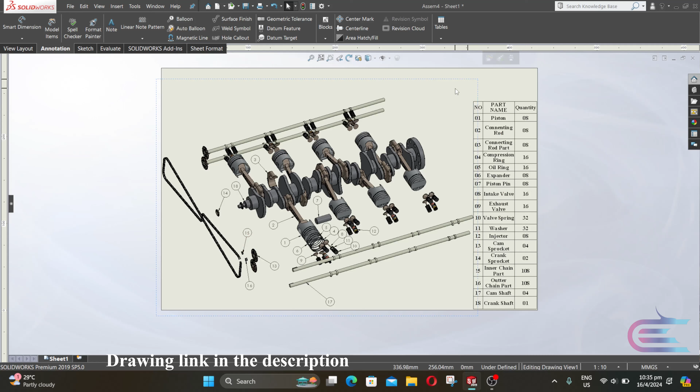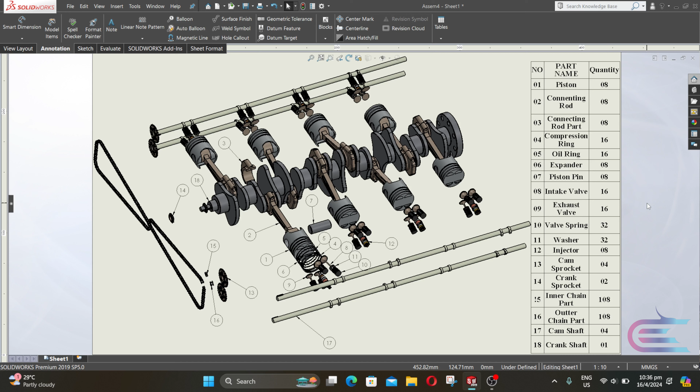In this tutorial, we are going to assemble the power transmission components of the Boxer 8 engine. First, we are going to assemble with the sprocket chain mechanism, and then we are going to use an alternative method which is a belt pulley. Remember, if your PC is not too powerful, it may slow down during chain sprocket assembly and cause serious problems during motion study. To avoid these problems, I recommend using the belt pulley method shown after the chain sprocket assembly.

Click on insert component and go to sprocket chain, then select crank sprocket and cam sprocket. Then click on open, place it here.

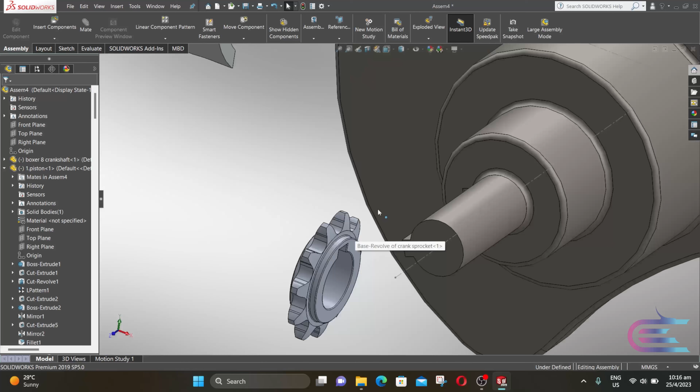Press Ctrl and select these two surfaces, then click on mate, select concentric and click OK. Now select the key slot surfaces, select coincident and click OK.

Now close the mate, expand insert component and select copy with mates. Then select the sprocket and click on next. Select this surface and then the key slot surface. Then click OK.

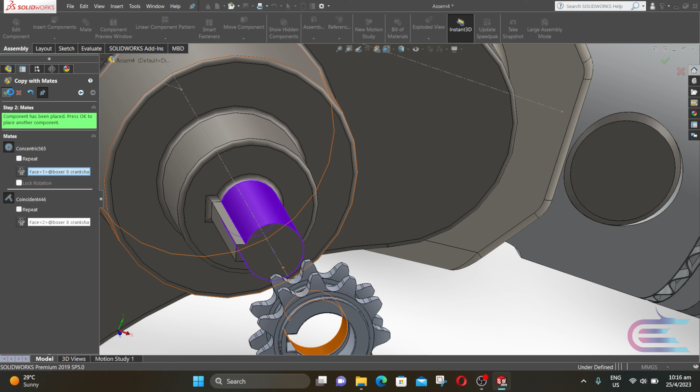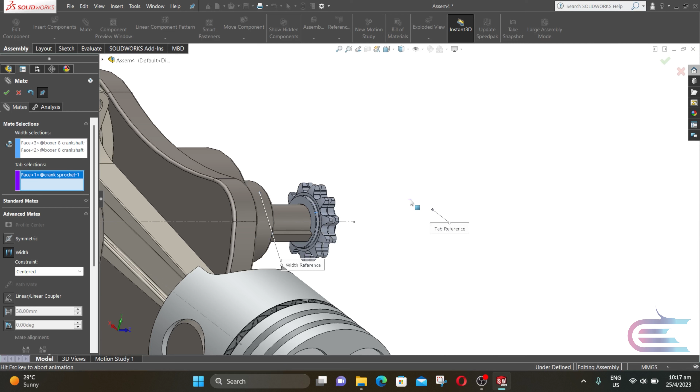Now press Ctrl and select these two surfaces. Then click on mate. Select coincident and click OK. Now select this surface, expand advanced mate and select width. Now select this surface and select both sides of the crank sprocket. Then click OK. Now close the mate.

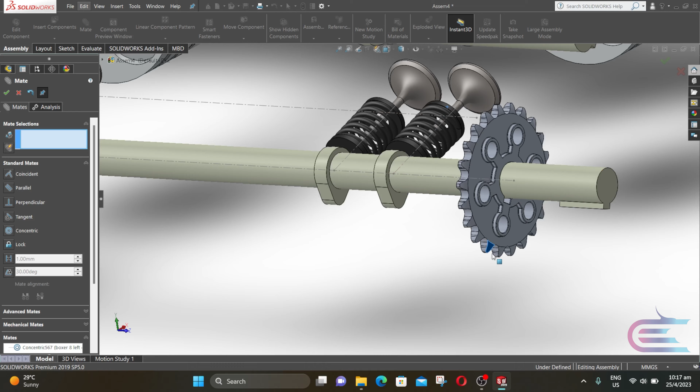Now press Ctrl and select this surface and this surface. Then click on mate. Select concentric and click OK. Now rotate the camshaft. Select the key slot surfaces. Select coincident and click OK.

Now click on insert component and select copy with mate. Then select the cam sprocket. Select this surface and then select the key slot surface. Then click OK.

Repeat the same process for these two camshafts.

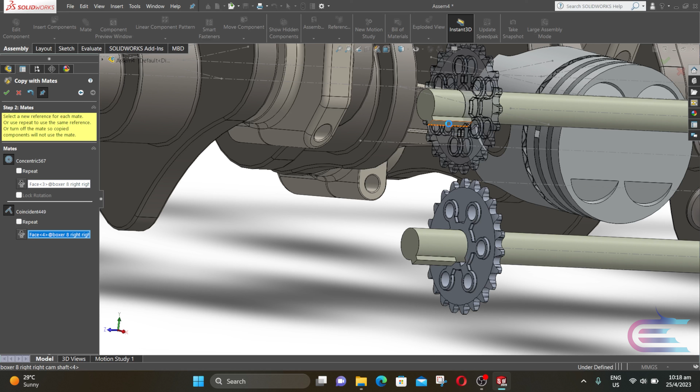Now close the mate. Press Ctrl and select these two surfaces. Then click on mate. Select coincident and click OK. Now select these two surfaces. Select coincident and click OK. Now close the mate.

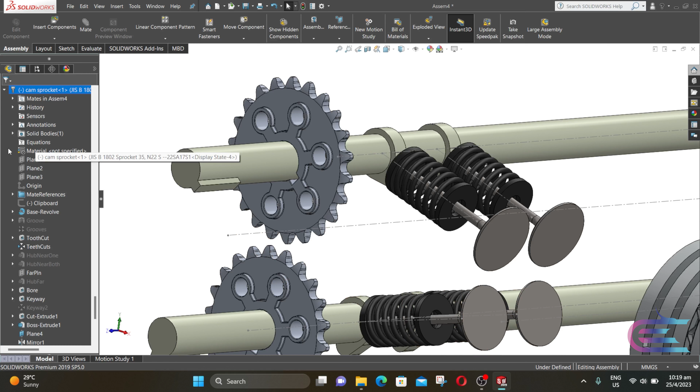Now expand any of these two cam sprockets and select the mid plane of it, which is plane 4. And select the mid plane of the first crank sprocket. Then click on mate. Select coincident and click OK. Now close the mate.

Now expand the second crank sprocket and select the mid plane of it, which is plane 6 here. And then expand any of these two cam sprockets and select the mid plane of it. Then select coincident and click OK. Now close the mate.

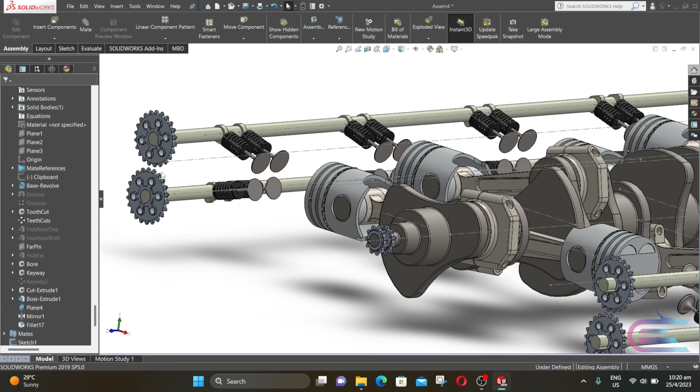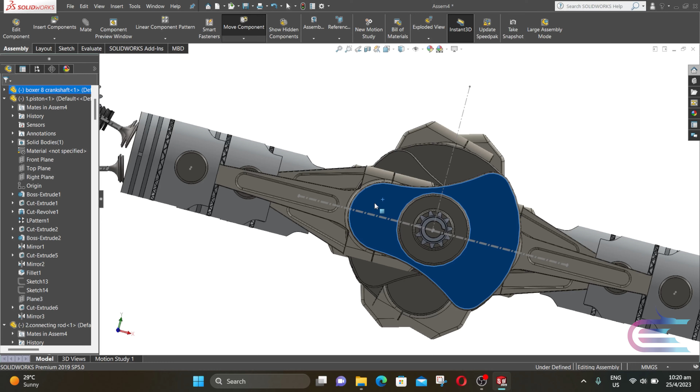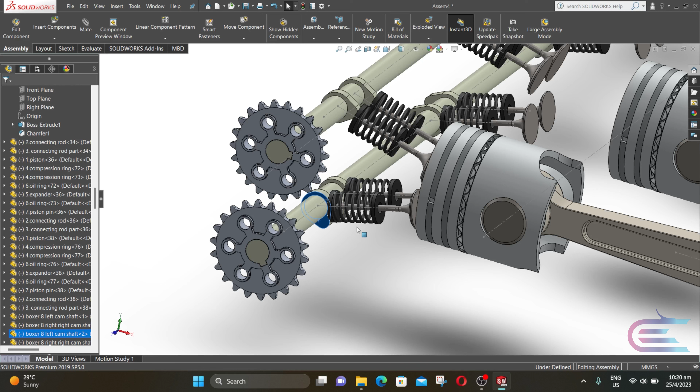Now we need to synchronize all of the engine components. Rotate the crankshaft and put the first piston at the top dead center. Now place the intake valve as it is almost open. And place the exhaust valve as it is almost closed. So the first cylinder is placed at the beginning of the intake stroke.

After 90 degrees of intake stroke in the first cylinder, the fourth cylinder will be in intake phase. So the camshaft will be 45 degrees inferior to the previous one.

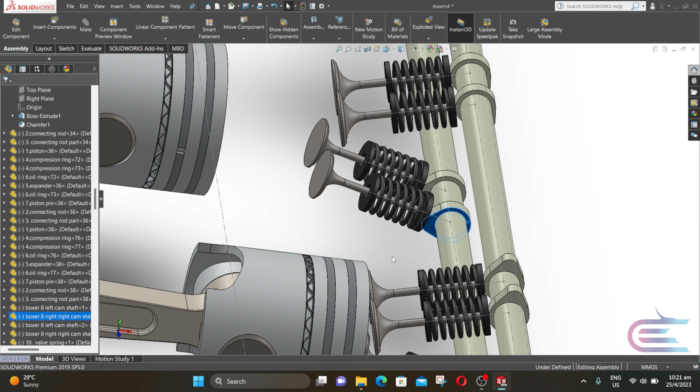Now expand assembly and select belt chain. Now select this circle of the cam sprockets and this circle of the crank sprocket. Now click on belt location plane, expand assembly and select mid plane of any of the sprockets.

Now click on use belt thickness and here input 5 mm. Then click OK. Now repeat the same process for the right side.

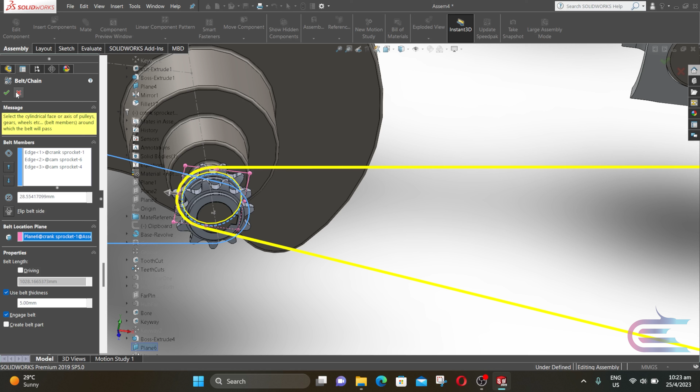Click on insert component and select chain inner part and chain outer part. Then click on open. Place them here.

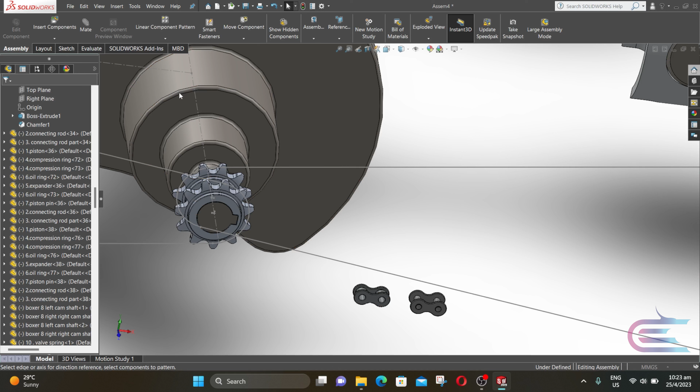Now expand linear component pattern and select chain component pattern. Select the third pitch method. Then expand assembly. Go to the bottom. Expand belt and select the belt path sketch.

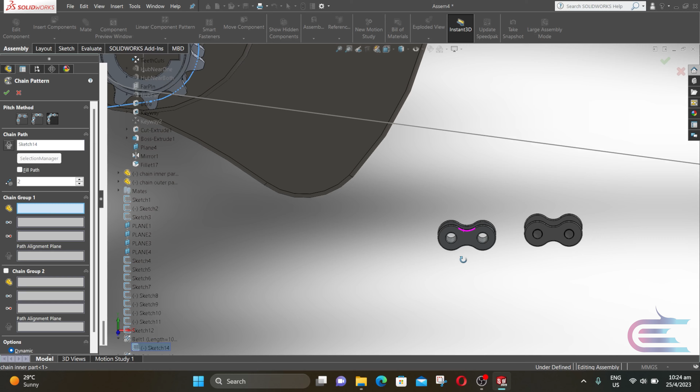Select chain group 1 and select the inner chain part. Select these two whole surfaces. It asks for path alignment plane. Expand inner chain part and select the mid plane of it, which is plane 1 here.

Click on chain group 2 and select the outer chain part and select these two surfaces. Then select the mid plane of the outer chain part, which is plane 2 here. Click on fill path.

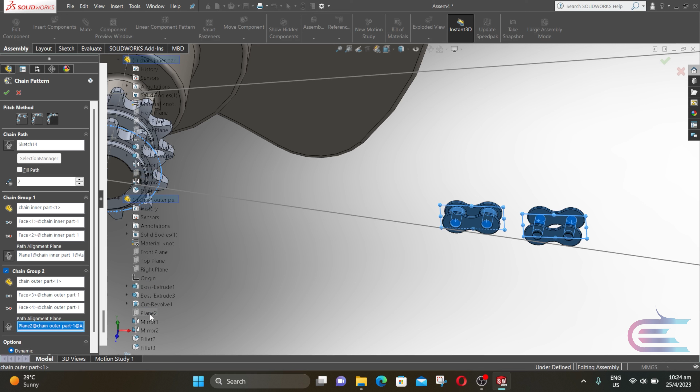Increase one more in quantity so there will be no gap. Then click OK. Now repeat the same process for the other side also.

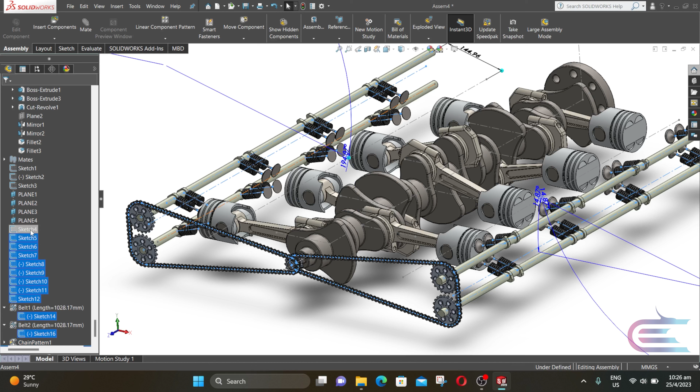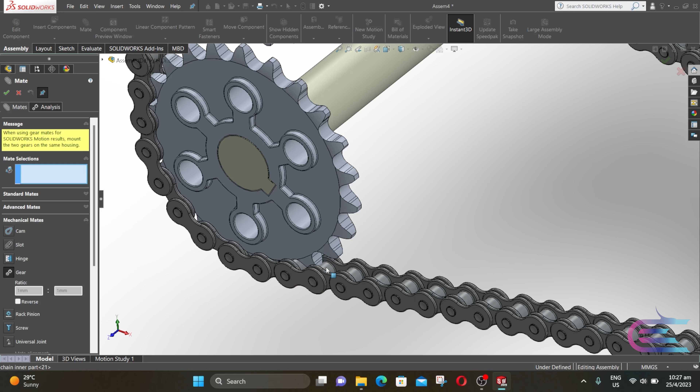Now press Ctrl and select all of these sketches. Now right click over them and select hide. Now click on Mate, expand mechanical mate, select gear, select this surface and this surface. Then click OK.

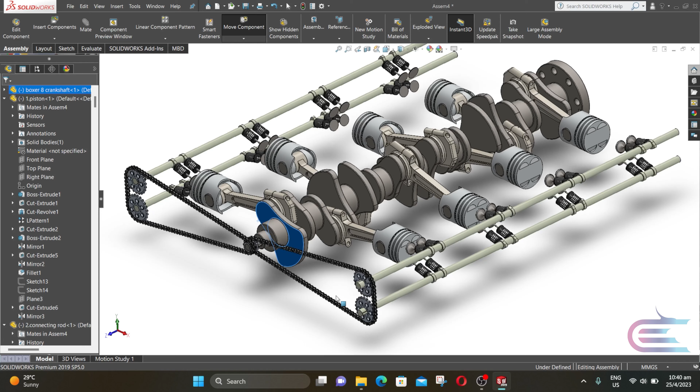Now we will assemble with belt and pulley. So click on insert component, select cam pulley and crank pulley, then click on open. Press Ctrl and select these two surfaces, then click on mate, select concentric and click OK. Then select this surface and this surface, select coincident and click OK.

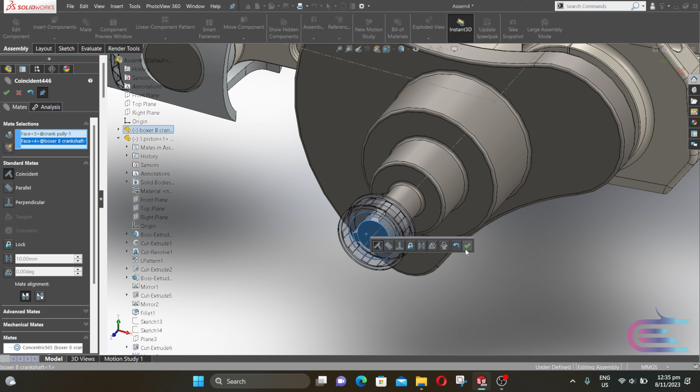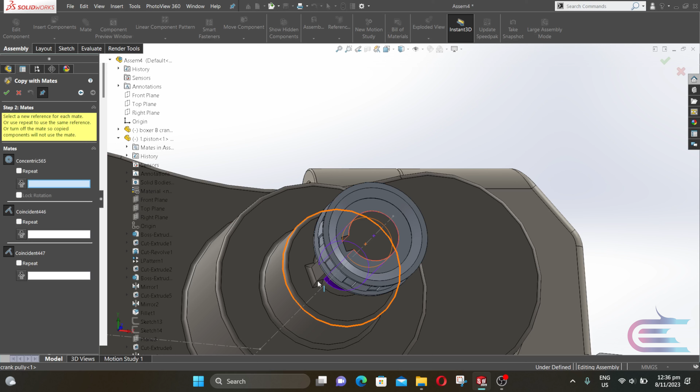Now select the key slot surfaces, then select coincident and click OK. Now close the mate, expand insert component and select copy with mate. Select the pulley, then click on next. Select this surface, skip the middle one and then click on the last box, then select this surface, then click OK.

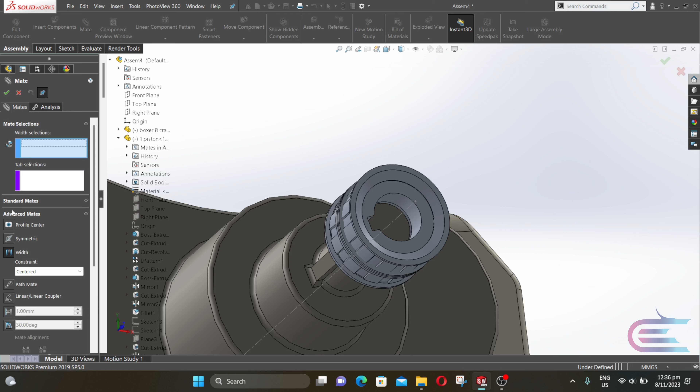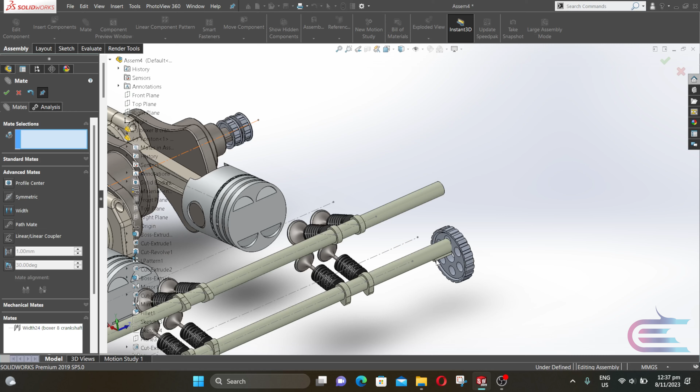Now close the mate, click on mate, expand advanced mate and select width. Now select these two surfaces of the crankshaft, then select both sides of the pulley. Now select this surface and this surface, go to standard mate and select concentric, then click OK.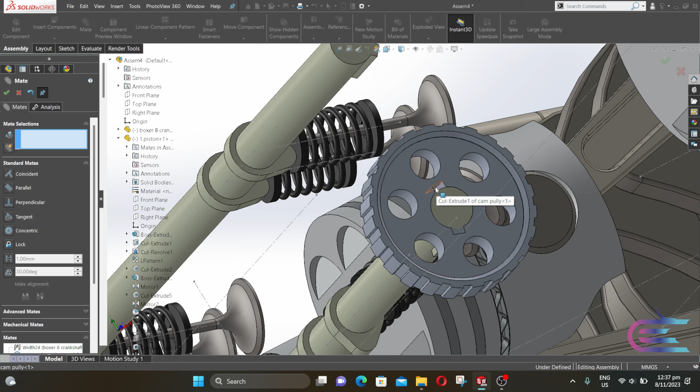Now select this surface and this surface, select coincident and click OK. Now select the key slot surfaces, select coincident and click OK. Now close the mate, expand insert component and select copy with mate, select the cam pulley, then click on next.

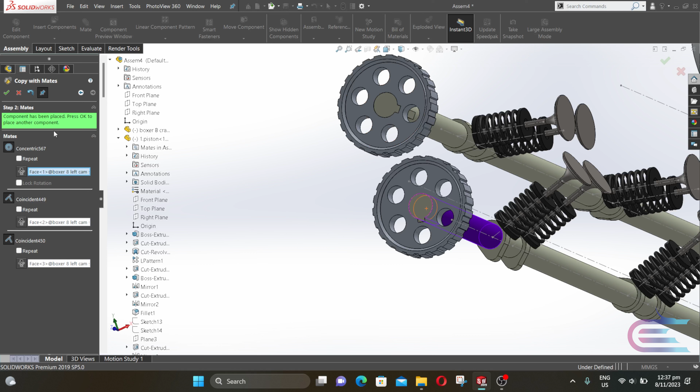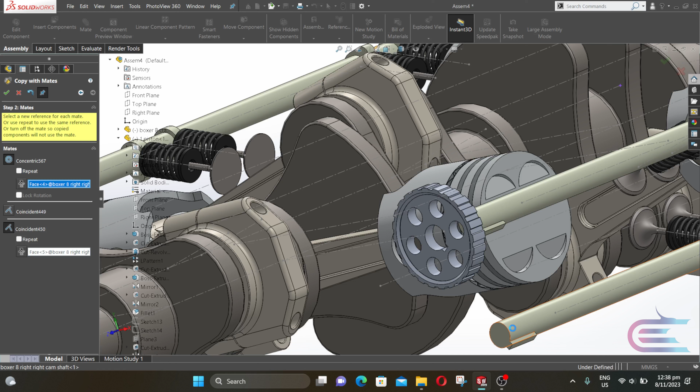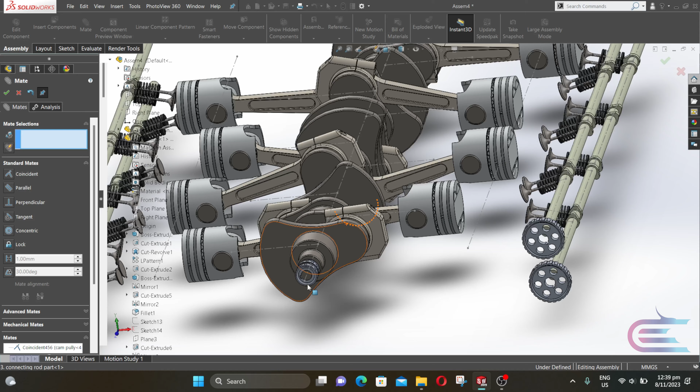Skip the middle box and go to the last one and select this surface. Then click OK. Now do the similar process for the last camshaft. Now click OK. Now click on Mate. Select this surface and this surface. Select coincident and click OK. Now close the mate.

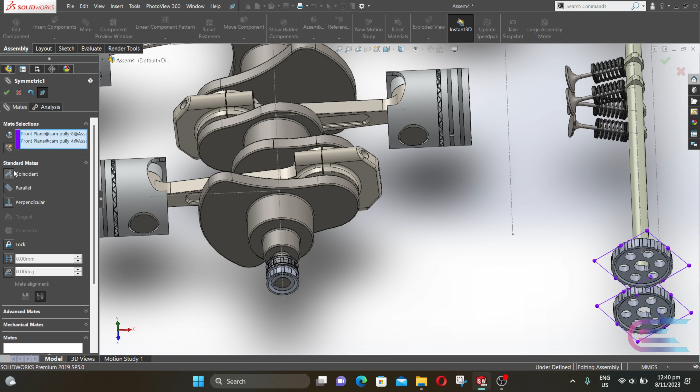Collapse all of these items so it will be easy to find the proper one. Now expand the second crank pulley. Click on the pulley so here blue color will be shown to identify it. Then select the front plane, which is the mid plane of the pulley. Expand any of these two cam pulleys and select the mid plane of it, which is the front plane. Then click on Mate. Select coincident and click OK. Now close the mate.

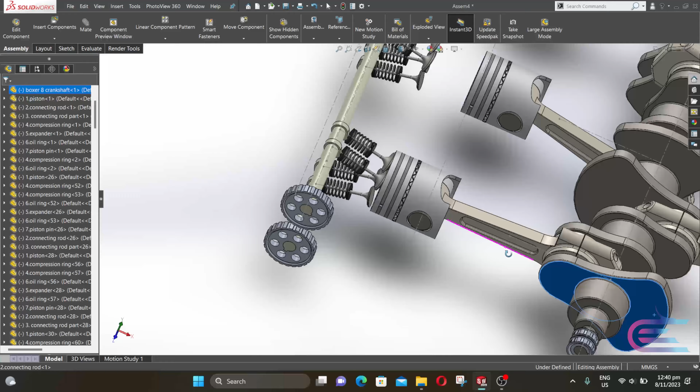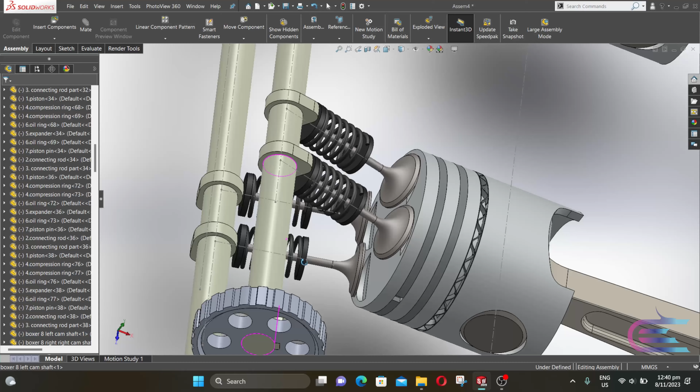Now we need to synchronize all of the engine components. Rotate the crankshaft and place the first piston to the top dead center. Here engine rotation is clockwise. Place all of the components as the beginning of intake stroke. Place the intake valve just before it is completely open. Place the exhaust valve as it is almost closed.

In 180-degree crank rotation, the last piston will be in intake stroke. So the camshaft will be 90-degree inferior to the first one. So place the intake and exhaust valve just 90-degree backward to the first one.

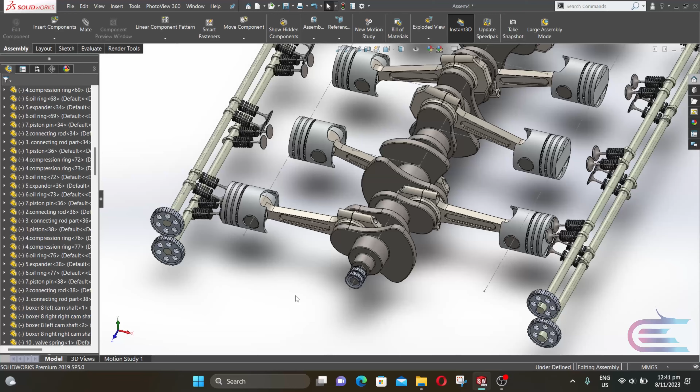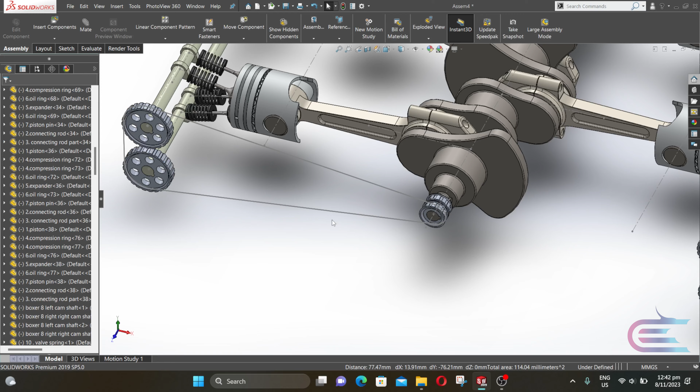Now expand assembly and select belt chain. Now select the outer surfaces of the pulleys. Click on create belt part. Then click OK. Now repeat the same process for creating another belt part.

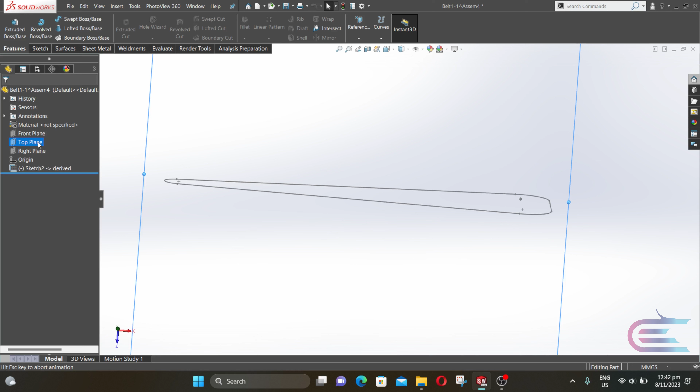Now go to bottom, expand belt, right click over the belt component and select open part. Now right click over the top plane and select normal to. Right click again and select sketch. Select line. Now draw the belt cross section.

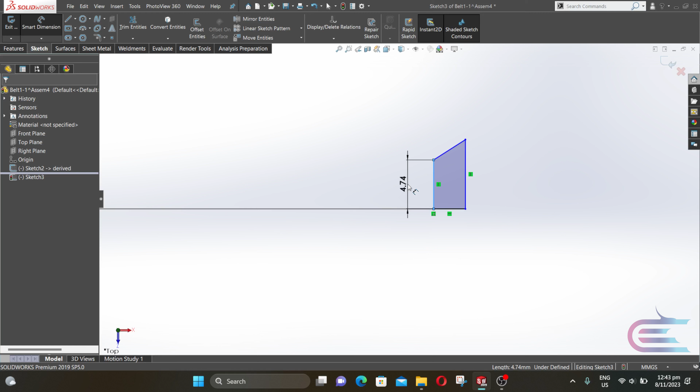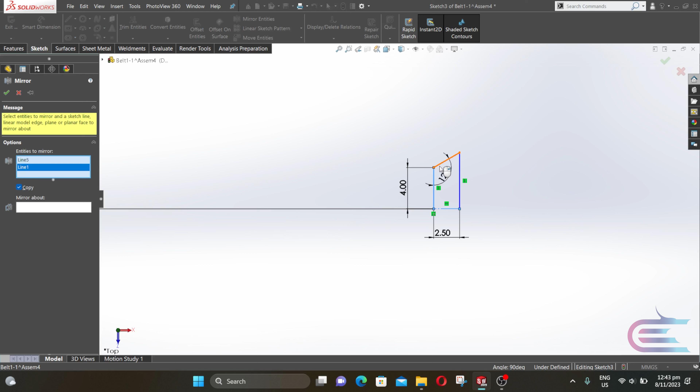Now press escape. Click on smart dimension. Select this line, 4 mm, and this angle is 120 degrees. The distance between these two lines is 2.5 millimeters. Now select this line, then click on for construction, then click OK. Now click on mirror. Now select the sketch and mirror about the center line, then click OK.

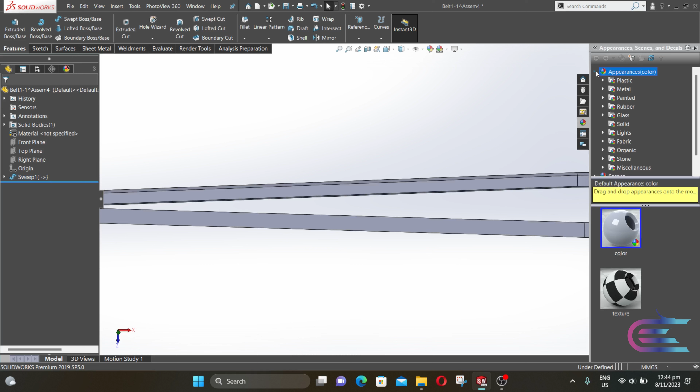From features, go to sweep boss base, select the sketch and select the belt path, then click OK. Go to appearance and select matte rubber. Now go to the assembly. Now repeat the same process for another belt also.

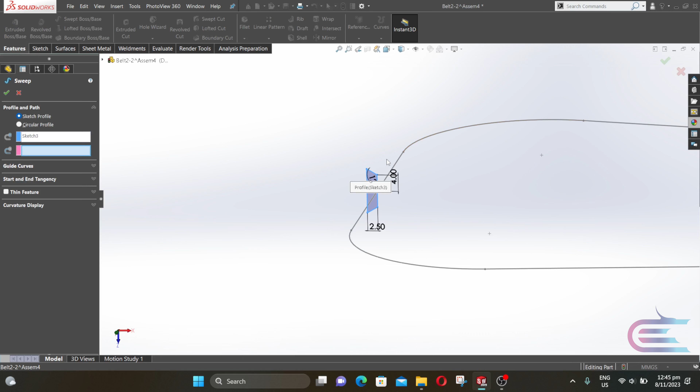Now press Ctrl and select all of these sketches. Right click over the sketch and select hide. Now rotate the crankshaft and check the assembly.